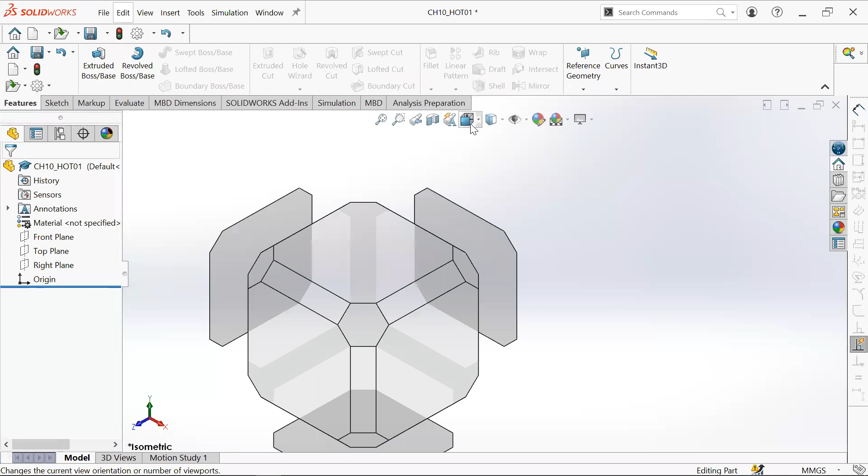So a good thing to do, if you know you're gonna make a drawing from the parts that you're making currently, is to check this view orientation tool. Oh, you can't move. Okay. You can hover around to different views of your part model that is yet to be made.

But it's a good idea to pick the isometric view and make sure your part model in the environment from this isometric view is what you want the isometric view in your drawing to be like. So as an example, this is essentially the isometric view of your drawing. Your drawing's going to have a front view, a top view, a side view, and possibly a bottom view, or maybe left and right views, based on the complexity

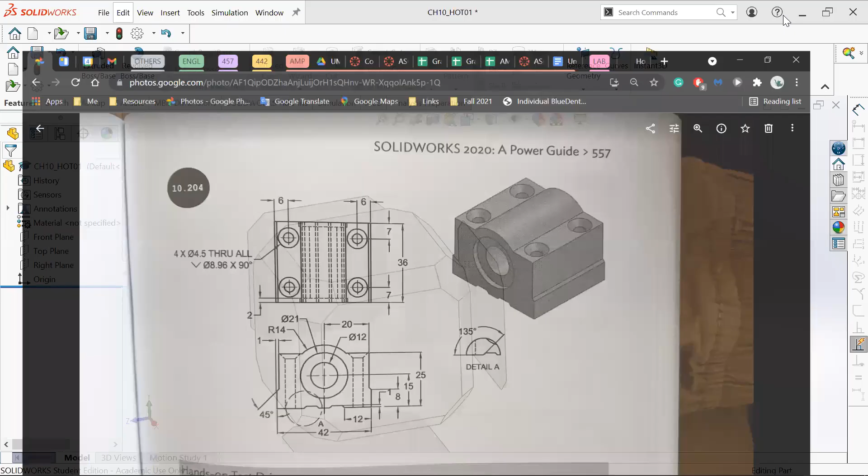of your parts. In this case, you want to make your part oriented so that your isometric view looks nice, and you can pull out all of these other views from your isometric view. Otherwise, once you're done making the parts, it's going to be very difficult, or maybe impossible, to get nice top, bottom, side, front, and isometric views from your parts. So it's better to just start with the correct orientation.

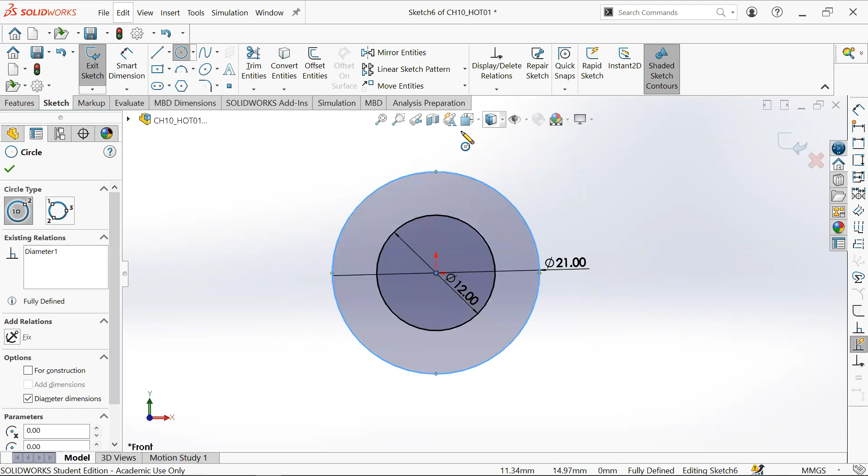Essentially, I want to start with the correct orientation. So in this case, sketch to basically mimic the orientation that's given in the textbook. So I want this front plane to be the front view, this way. If you see here, view orientation, isometric view, as you can sort of tell already, when you extrude this out, it's gonna be very similar to this view right here.

So again, you want to be mindful of the orientation your parts will have, because it's very difficult, or at least very annoying, to change it later on down the line. So start with the correct orientation.

So again, 12 millimeters diameter, 21 millimeters. Okay, this arc here is 14 radius. It appears we can just do half of this and mirror it over to the other side. That would be much easier than doing both sides. So let's make a center line.

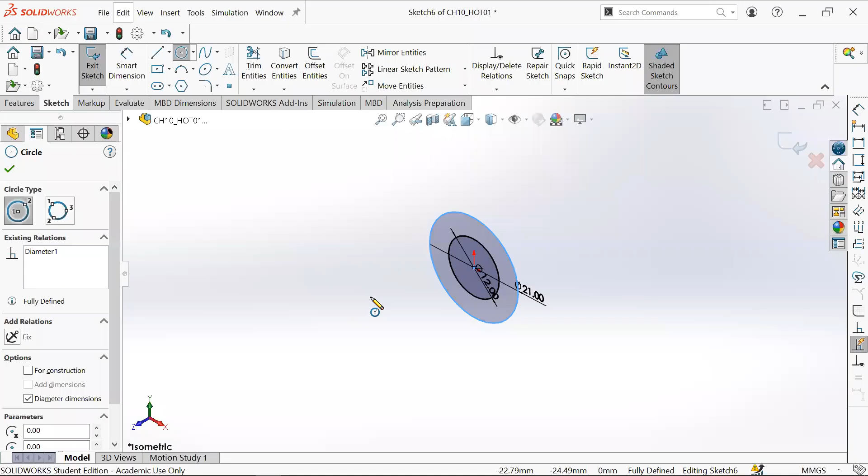Keep in mind to make a center line, and then an arc here with a radius of 14. So let's go back to our sketch, Control 8. Let's make a center line, or construction line. Make sure it's vertically constrained. Nice. This is not going anywhere. Perfect. Let's make an arc.

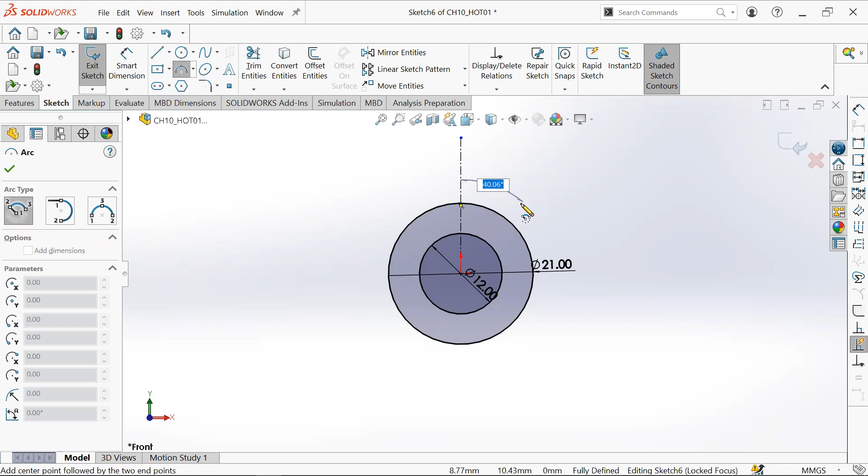Let's do a 3-point arc. In this case, I'm not sure if the center point is the same. Let's double check. Okay, so it seems like all three of these arcs or circles are concentric. So we start right here, go up to 14, click enter, click, pull out a little bit. We don't have to make sure that this arc length is a certain amount just yet. Once we get the other lines down, we can then fully define this.

Okay, let's see how long this horizontal length is. So this length here is 1 millimeter. This whole length here is 12. This is 20. So going from the center line to the sideline here is 20. So we basically go off of that distance.

So let's make some lines. One here, one here, one here. And I'm just going to get a general shape down. It's not going to be very accurate, but I think I have a good idea of how it looks roughly. You can always go back and make it more accurate after you get a general shape down. Okay.

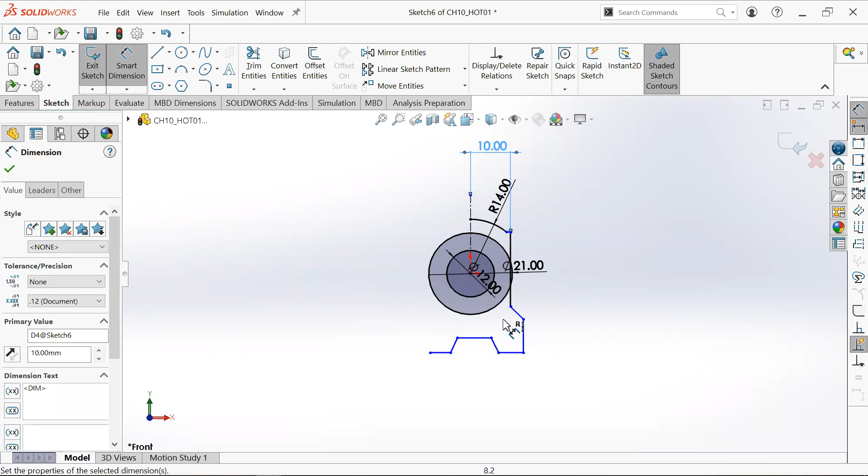So this side length here to the center line distance is 20. This distance here is 20. Not 10, 20. There we go. This is still defined. This arc length here is not defined. Let's see if we can define that. Okay, we can define that by just setting this height, I think, to 25. So this height here should be 25.

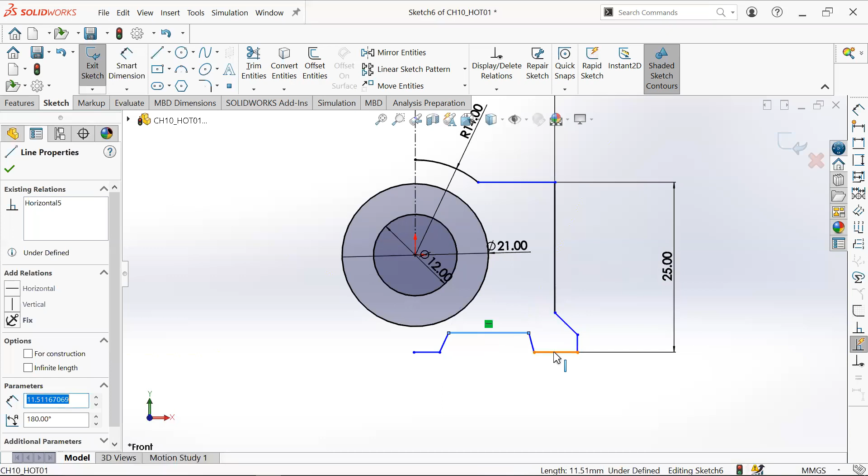Okay, it seems like these lines are horizontally constrained, which means they will move together. Oh, never mind. You want these to be collinear. This way, these two lines will move together. Perfect. Okay, so this thing still moves, which means we're still missing a few dimensions, but we're not in a rush. So let's take it slow, nice and slow.

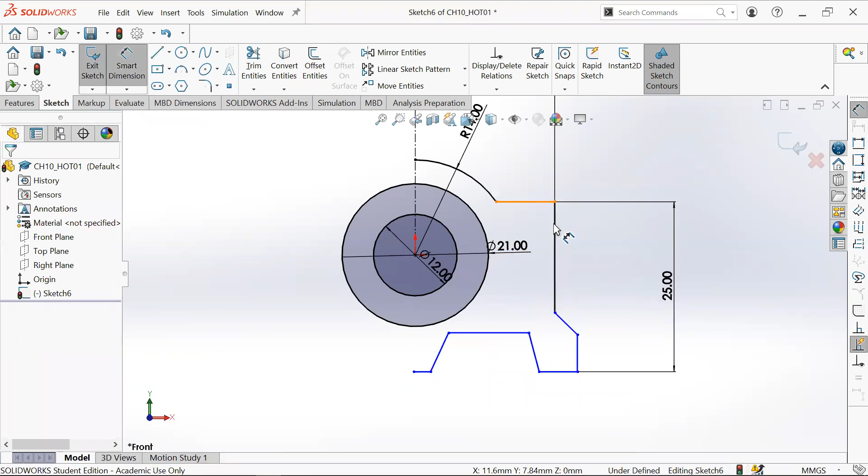So going from the center point of these circles to the bottom is 15. Let's do that. Center point to the bottom is 15. There you go. So now this is fully defined. Perfect. So as you add more dimensions, oftentimes it will become fully defined without you actively trying to define it, as long as you add the correct dimensions step by step.

Okay, let's organize our dimensions because it gets very confusing and messy if you don't. So let's place these in strategic areas to be out of the way of the sketch. The bottom length here is 1. This length here is also 1. These seem to be chamfers. You can either chamfer these or you can directly build them into your sketch. This symbol here is for chamfer. We'll talk more about that next video.

So let's see. As indicated here, this angle here is 45 degrees. Okay. And because there's a center line here, you only have to label half of the shape if it's symmetrical. You can instantly assume that because there's a center line right there, whatever dimensions are on either side will apply to the other symmetrical side as well. So in this case, both sides have this angle of 45 degrees.

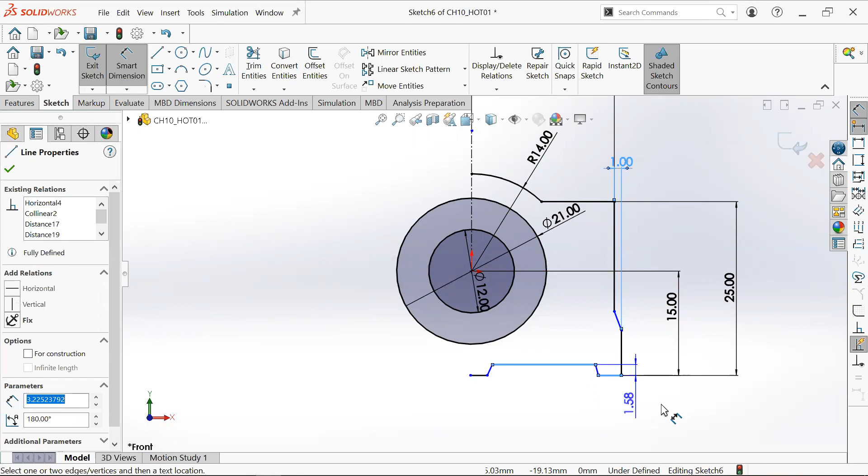And this bottom here has an angle of 135 degrees. So these are all basically 45-degree angle chamfers. But you can either chamfer these or you can just sketch them into your part normally. So let's check our dimensions again. This is 1. And this is also 1. Nice. So now we have this thing.

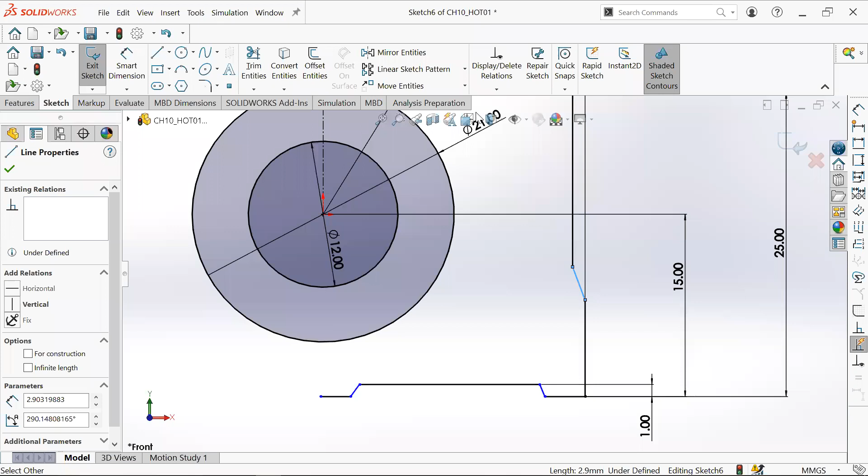Let's see. Okay. Because they used this point here as a reference point, I believe it's easier personally for me to just sketch in these chamfers instead of using the chamfer tool. So I'll just manually put in the angles. Again, there's more than one way of doing these things.

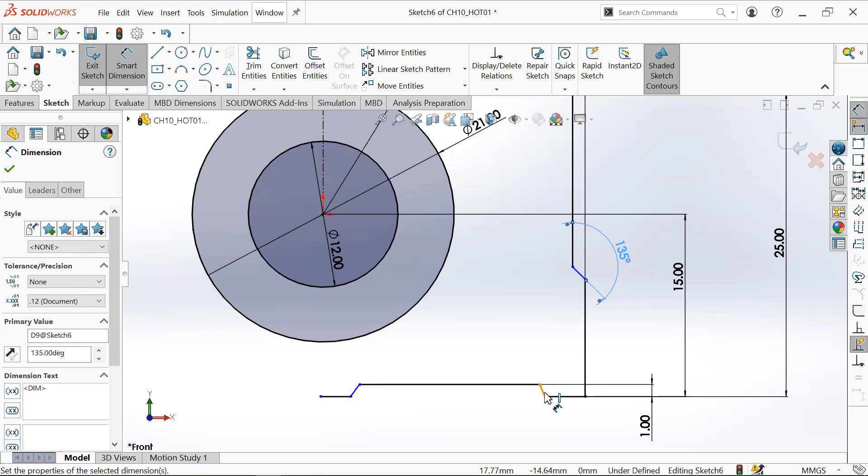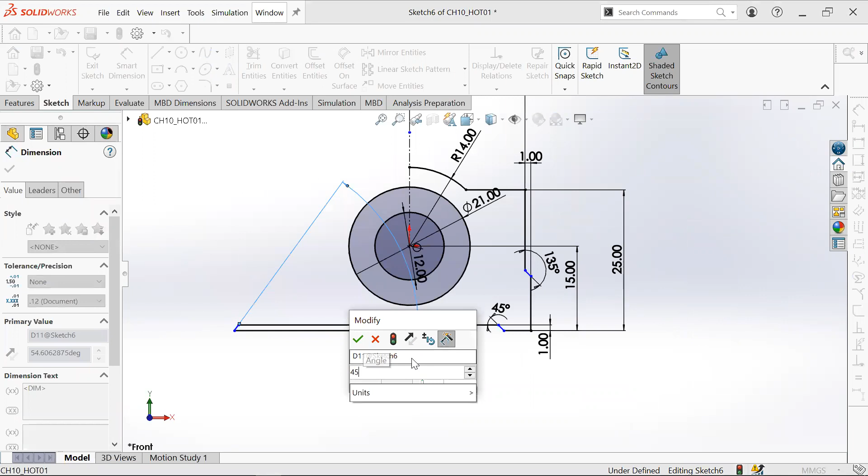So based on where you start your angle line, you either get 45 degrees or 135. It's just based on where you start on the arc. And so let's make these the same as well. 135. Oops, these are 45s. And, oops. Okay. Drag this back.

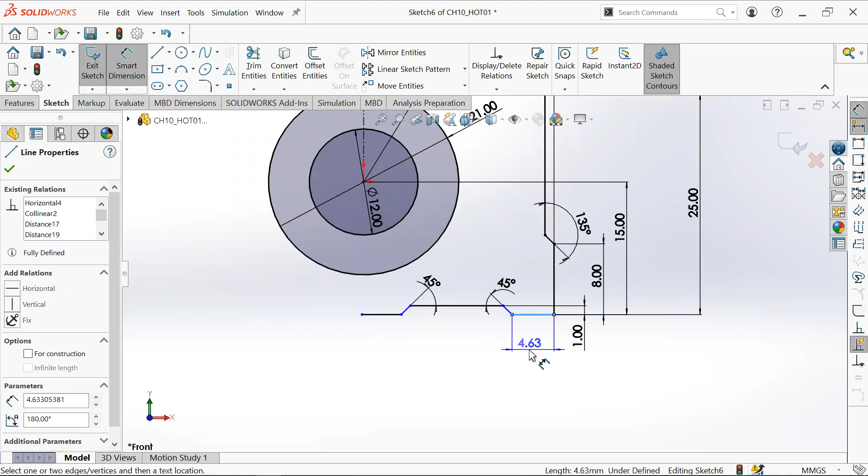Interesting. Pull this down. All right. Let's see what dimensions we're missing. This is 8. This is 12. So let's add those. This is 8, and this is 12. Wait a minute. Yes, 12. I want to make sure that this point and the center point here are vertical. That way, when we mirror this, this point will connect with the other side.

So this is still free to move, still blue. So we want to constrain this somehow. This distance here, 12. Is it missing a dimension? Oh, no, the total is 42 millimeters, which means... Huh. Interesting. What am I missing? 20, 12, 14, 45 degrees. It doesn't say how long this is. Am I missing something?

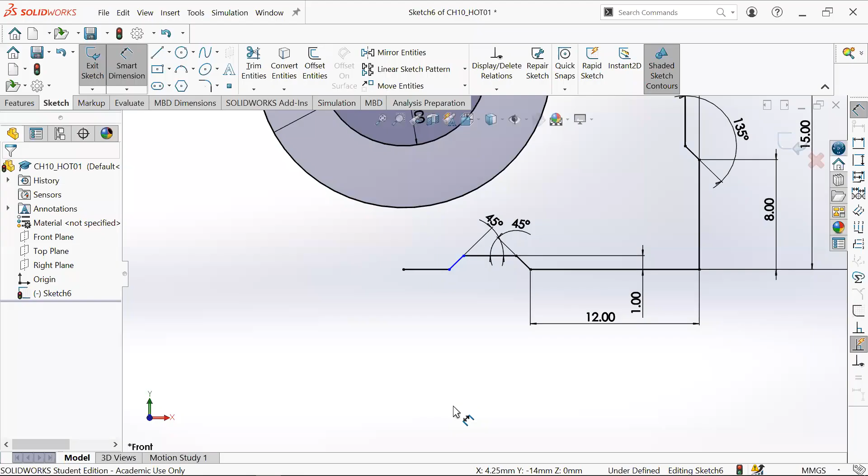All right. It looks like this is not dimensioned. Pretty sure it's missing a dimension here. No, nothing. Double check. 2, 6. Is it aligned with something? It is not aligned with anything. 12. Yeah, it doesn't say what the length is here. But we do know this full length here is 21. Okay, we don't really need that part. So we're missing a dimension here. I am not sure what this is actually.

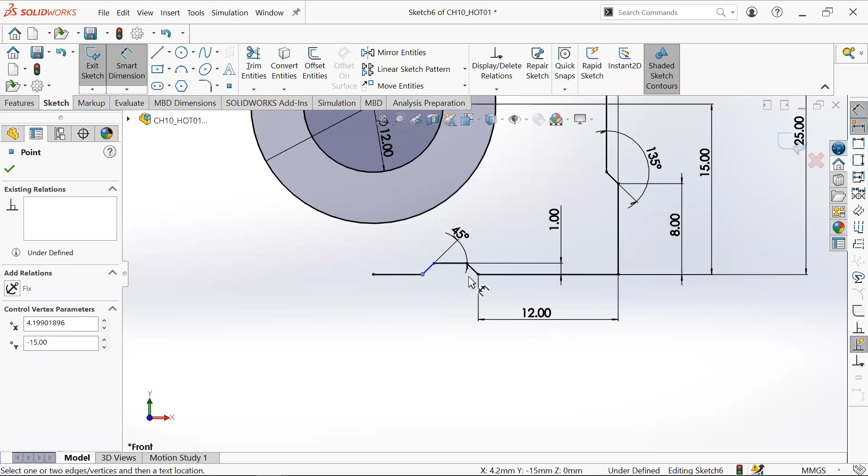We can actually get rid of this angle as well. If we make these two lines here parallel, we only need one dimension. Nice. So now it looks much cleaner. What is this length here though? Doesn't say. We might just have to assume what it is. I don't think it matters too much in this case, since this is not an assignment for you guys. So we can just give it an arbitrary value. Oh, whoops, this is way too much. 4.5. It seems about right, actually. It's either 4.5 or something near that.

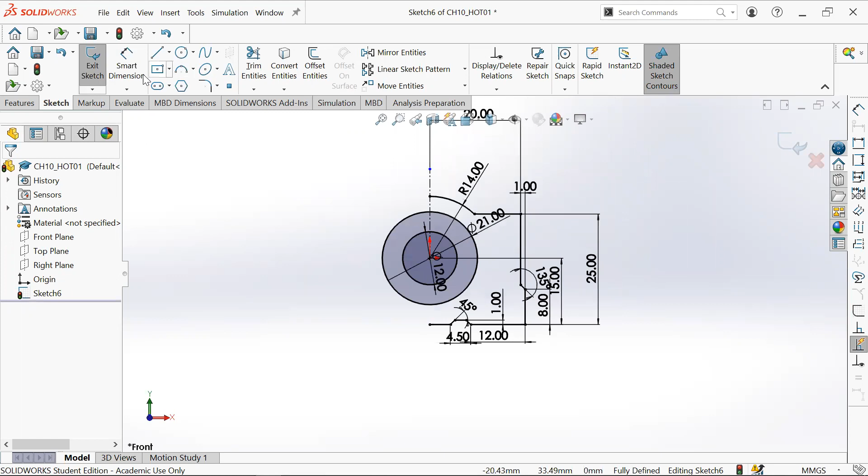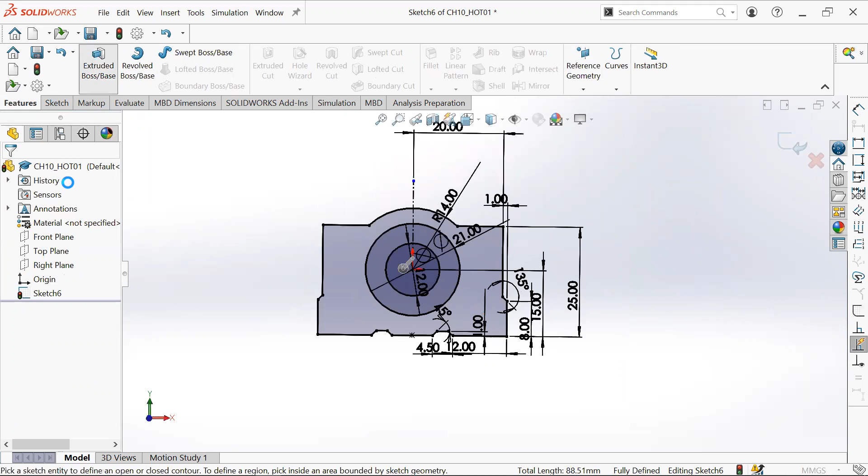So now we can mirror. Again, we're just going over the concepts here. It doesn't matter if you get the dimensions or the part model perfectly accurate. So we just want to mirror the outline, and we mirror about the center line here. Check. Kaboosh. Done. Okay. We can directly go into features, extrude. And we can do a both side extrude. So make sure to select your contours correctly. So we want to do this outer ring, I think. Yep.

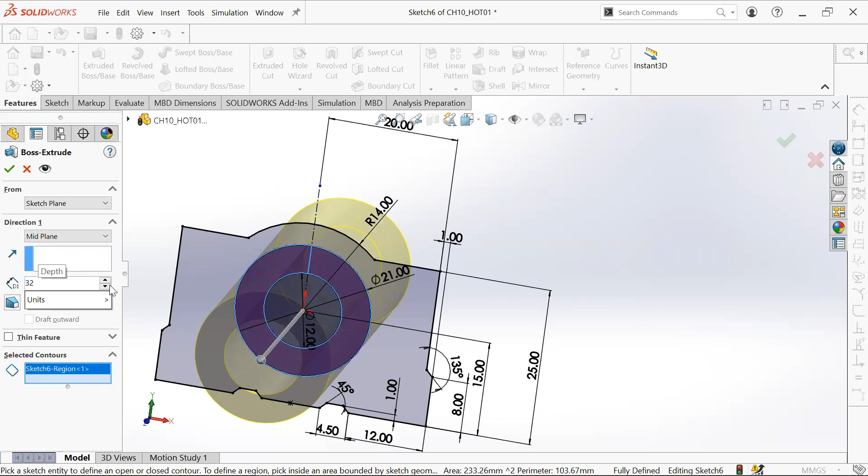And this outer ring, there's a gap of 2. There's this little indent here of 2 millimeters. So 2 millimeter deduction from both sides, and the total length is 36. So the total length on the inside here will be 32 because we're missing 2 from both sides. So instead of doing blind, we do midplane. And then instead of 36, we do 32. All right. Make sure everything's fine. We don't want thin feature, we just want this. Nice.

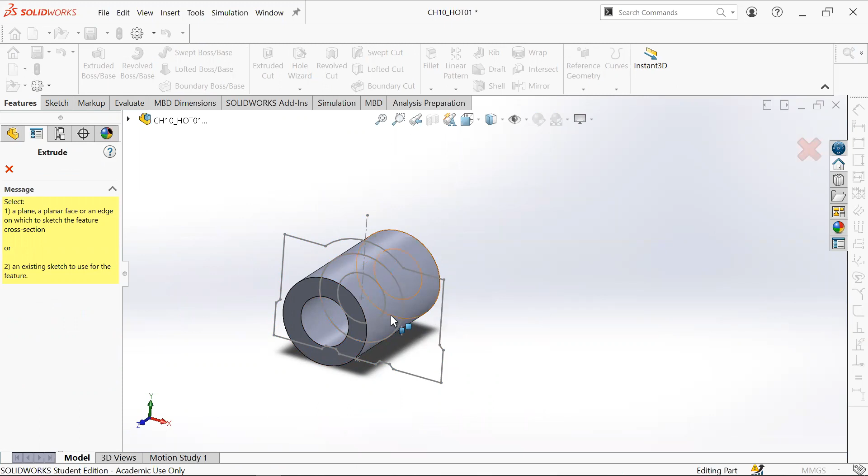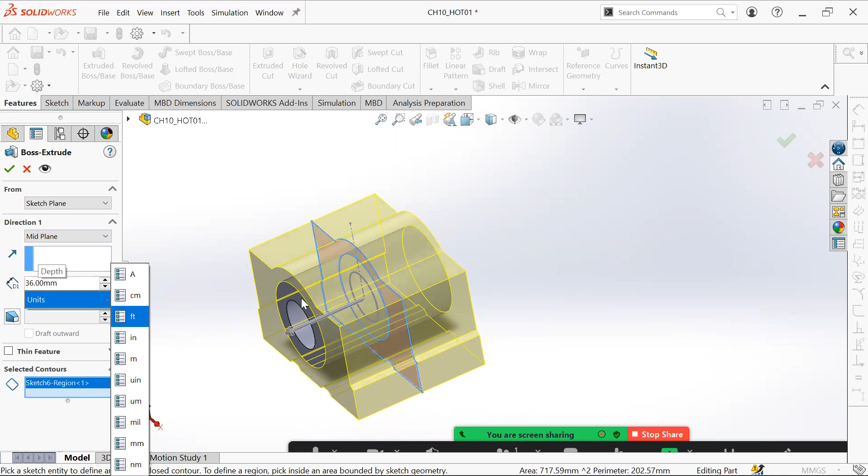Now we go back and show the sketch, and extrude something else from the same sketch. And now we want to select the outline. So we don't want the contour that SOLIDWORKS selected for us. We want to choose our own contour, which is this. Midplane again. For this, we want 36 because it protrudes out more than the inner extrude. It's longer than the inner extrude. There we go. Now this basically is how our overall part looks. We're making good progress so far.

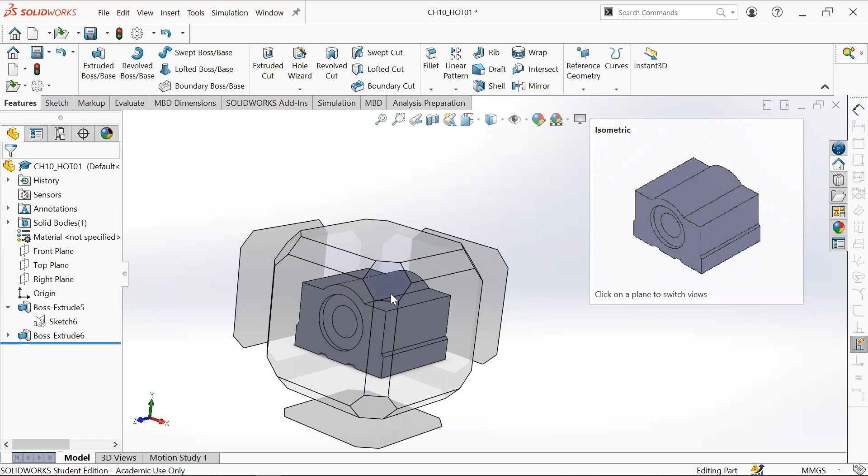Nice. So if you go back into your view orientation tool and hover over isometric, as you can see in the picture, the labeling on the top left corner says isometric. So this is the view you'll get if you place it directly into your sketch, the same view given in the book. So you want to make sure that when you're building your part, your isometric view looks like what you want for the drawings. Basically, you're planning ahead. Even before you start making the parts, you're thinking about how your drawing should look and how it should best be oriented so that it's easier for the viewers and for you to make out.

So let's finish the part. We're missing the holes, and those should be it, I think. Okay, so the holes are chamfered. Okay.

Okay, so we can make these using the hole features because I believe these are a certain type of hole that the hole tool can give us. So let's just put down some circles or some points for us to use as reference when we're using the hole tool. So let's make them. There's 6 from the side and 7 from the bottom.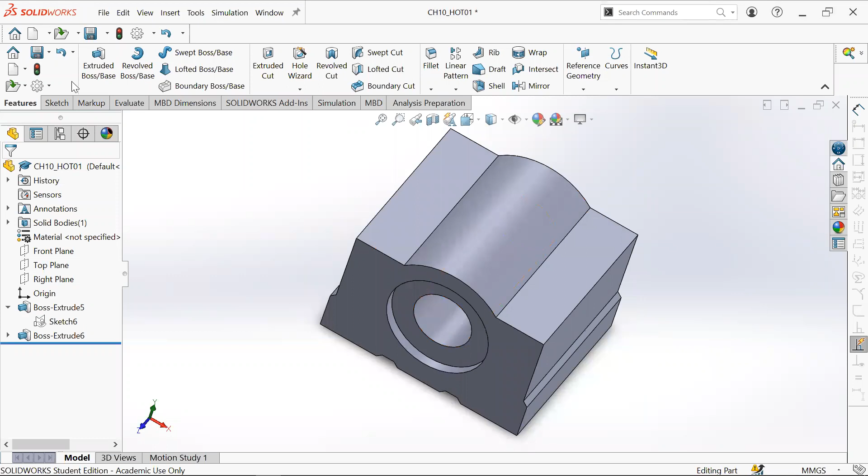Okay. Let's sketch. We put our sketch directly on this top plane here. Since these two surfaces are on the same plane, we can just sketch on this one surface, this overall plane that's on the surface. So let's see, sketch, circle. We can just do, okay, 6 on side, 7 from.

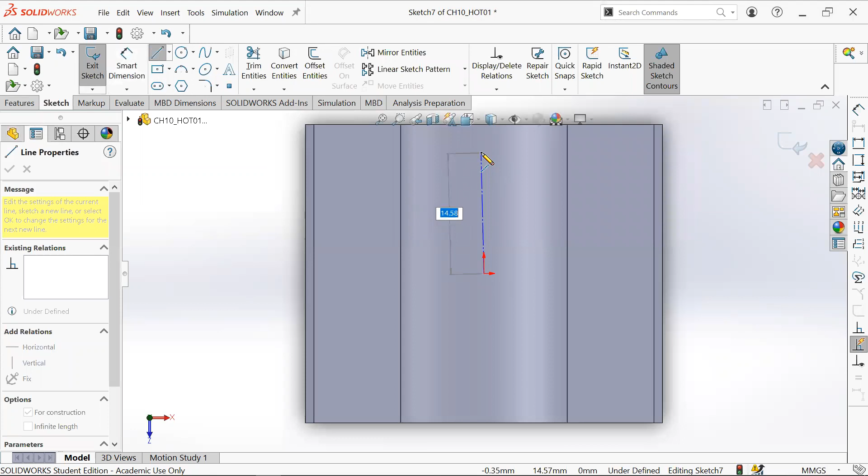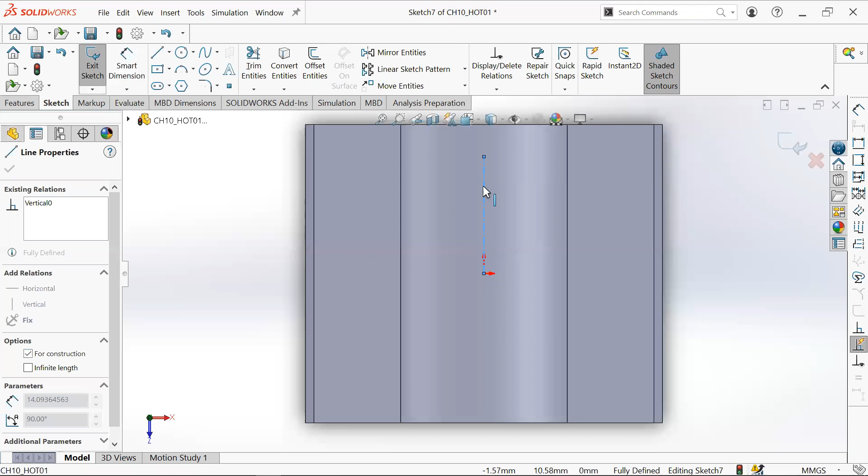We can also use the mirror tool here. If we just make a center line, we can either mirror before or after we use the hole tool. In this case, mirroring after using the hole tool will be easier because we don't have to select an extra 2 circles for the hole. Want to make this vertical, so it's fixed. This is not going anywhere as well. So make a circle, make a circle.

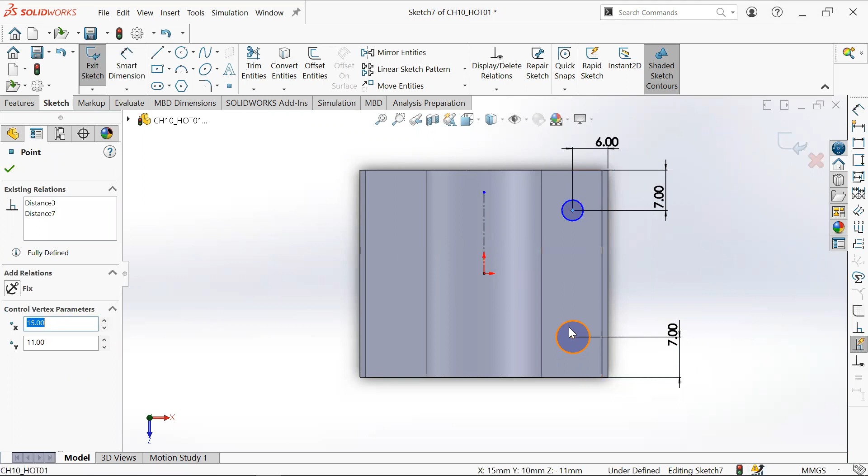I believe it's 7 from the top, 6 from the side. Yep. Shucks. On the long side. So center point to the long side should be 6. And this height here should be 7. And for the 6, we can just make these 2 vertically constrained. They're on the same vertical line. Let's make these 2 circles equal as well.

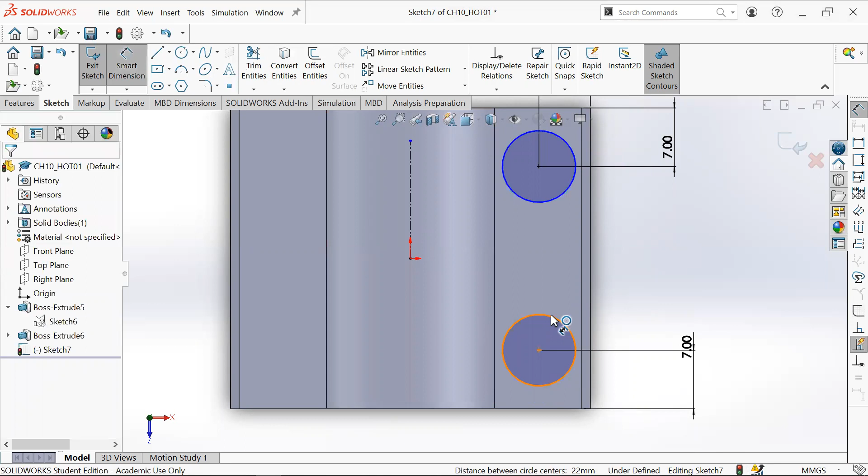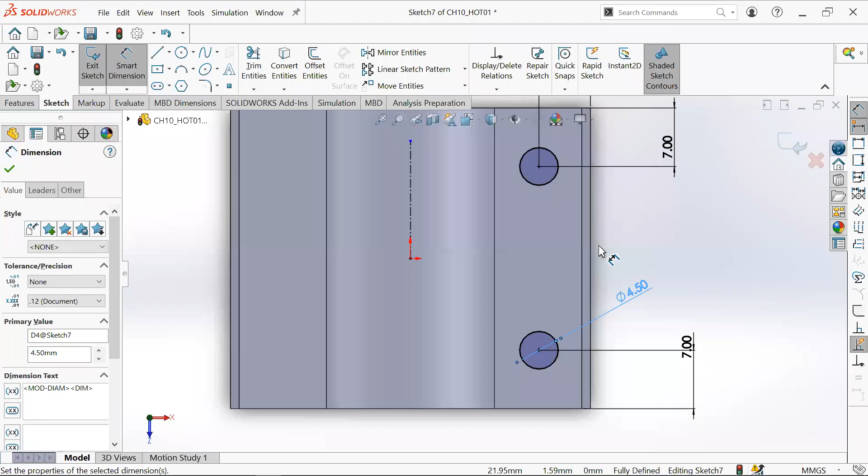And then we can just dimension one of these circles, which is 4.5 millimeters in diameter. Nice. Okay. So you have to be careful. This is the outer diameter of the circle, not the inner. So make sure to keep that in mind and double check to make sure that your circles are the right diameter. But this seems a little bit.

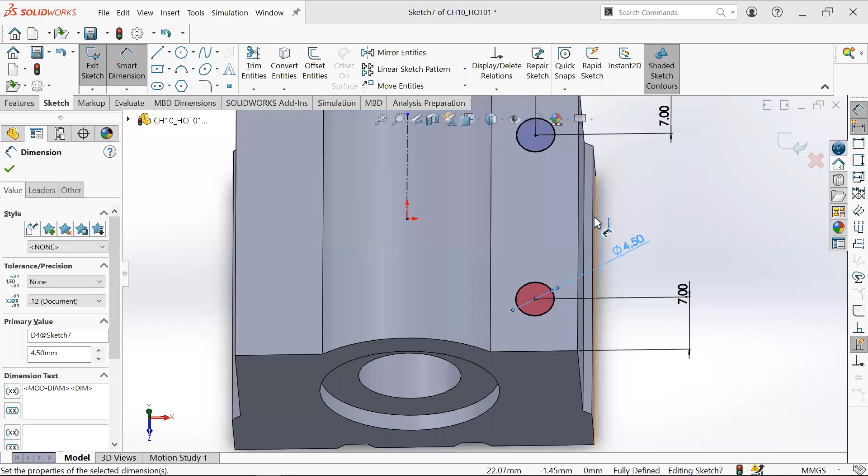Oh, no. Okay, so the inner circle is actually 4.5 millimeters because it doesn't look large enough. So I actually made a mistake here. It should be the inner circle that is 4.5 millimeters. Yep. Okay, since we're already here, you can either use the hole tool or the extrude cut then chamfer combination. Let's try doing both. Let's try the hole tool first, and then we can do the other approach, which is extrude cut then chamfer.

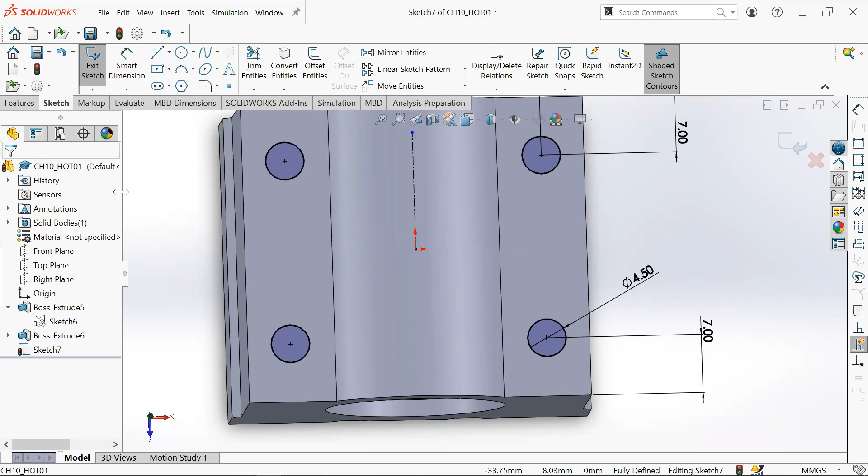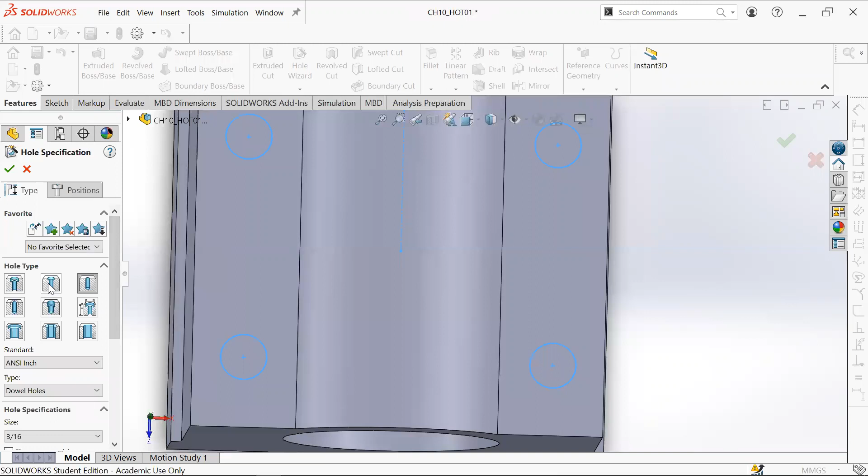So first, let's finish the sketch by just mirroring these 2 circles about the center line. Okay, everything's fully defined. Check your bottom, fully defined. Nice. Okay. So let's start by going to features using the hole wizard. There you go. This is the countersink hole type. Positions, we choose the center point. We click on the surface, we choose these center points.

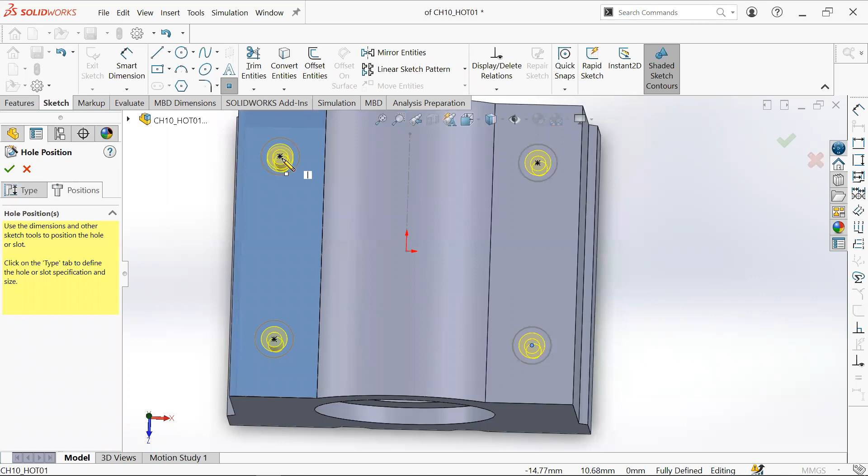So in this case, we don't need the circles, but the circles are convenient in that they have a center point built into them. So you can choose to either use extrude cut or a hole type. It's slightly more work than just putting down points, but it gives you more options. And I just like using circles as well. So again, there's more than one correct way of making these parts. Who knows? Maybe your way is much faster, or you just prefer your way better. Up to you.

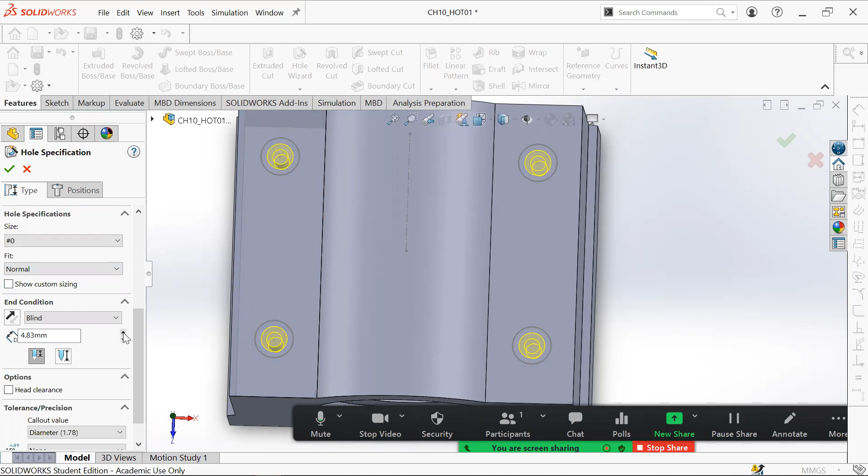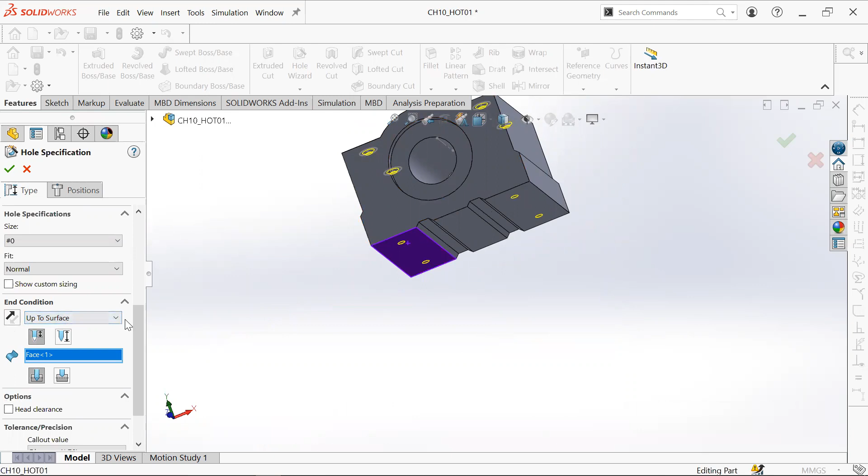So let's make sure these dimensions are correct. Oh no, this distance here is not correct. Let's choose up to surface, so the hole goes all the way through until it hits the surface. Nice. As you can see in this preview, the holes go all the way down until they hit the next surface and stop right there. So that is what up to surface means. You can change the direction, but we don't want to click on that option for this case.

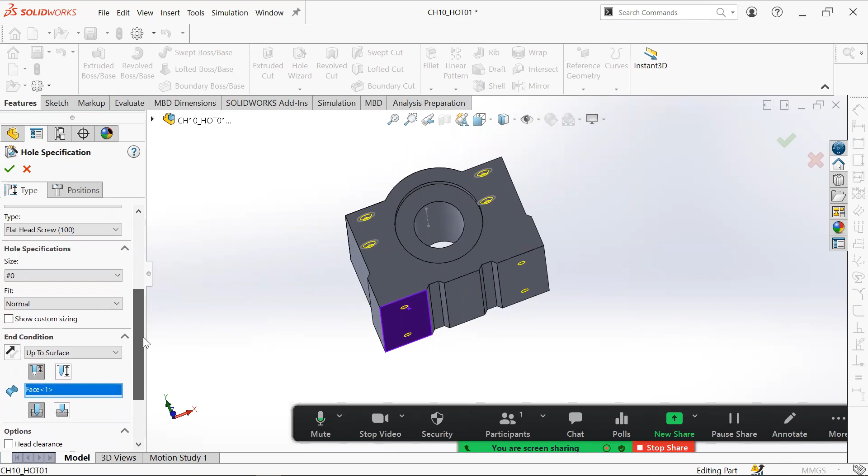Okay. So tolerance and precision, this is not for us right now. We don't have to worry about that. Let's check the size though. The size is not correct. Let's make sure this hole matches the diameter that we have with the circle, because as we had previously looked at, this diameter is actually the inner hole shape. So we're gonna change the size a little bit.

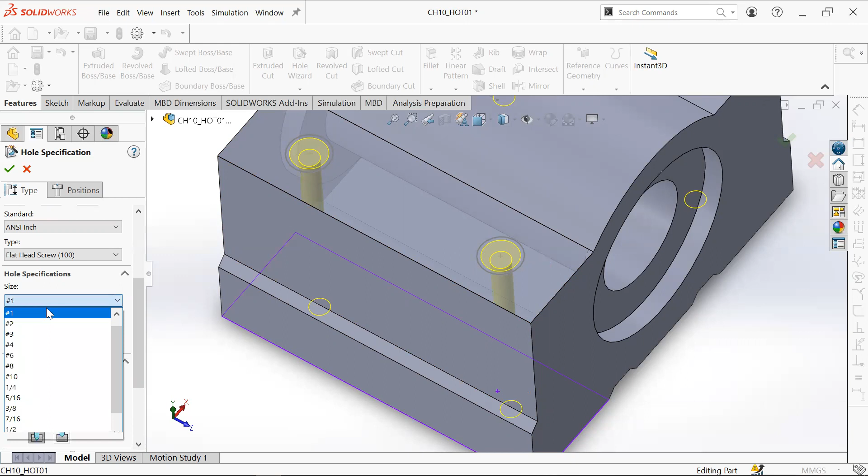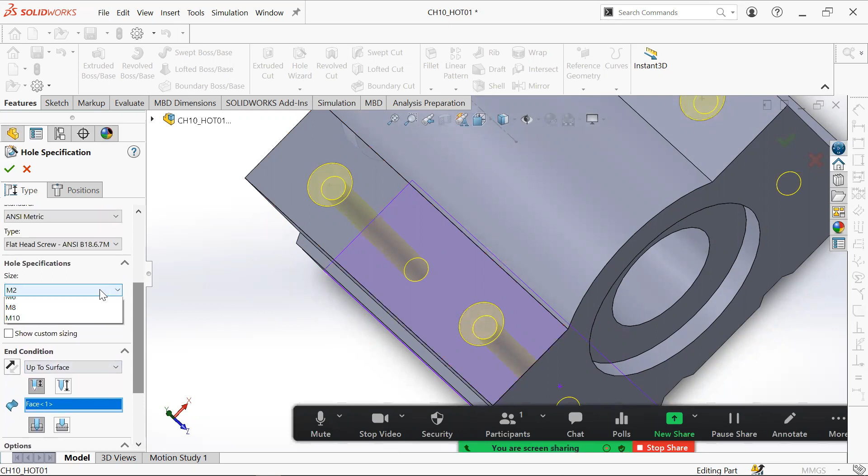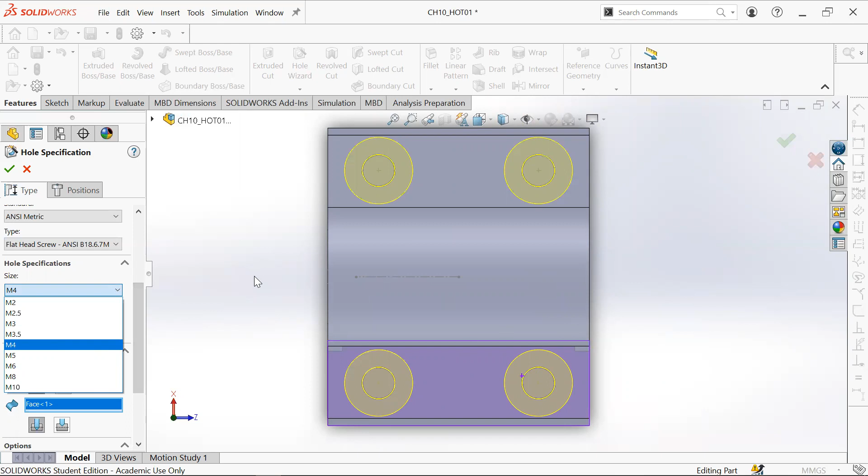So we're gonna change the standard to millimeters, so it's easier for us to determine the hole diameter. Let's see, ANSI metric should be fine. So we want M4, it would seem. So this is a downside with using the hole feature: the screw and hole names and classifications are a little bit more confusing. As we'll go over later, I think it's more intuitive if you just use extrude cut then chamfering, but this is one way.

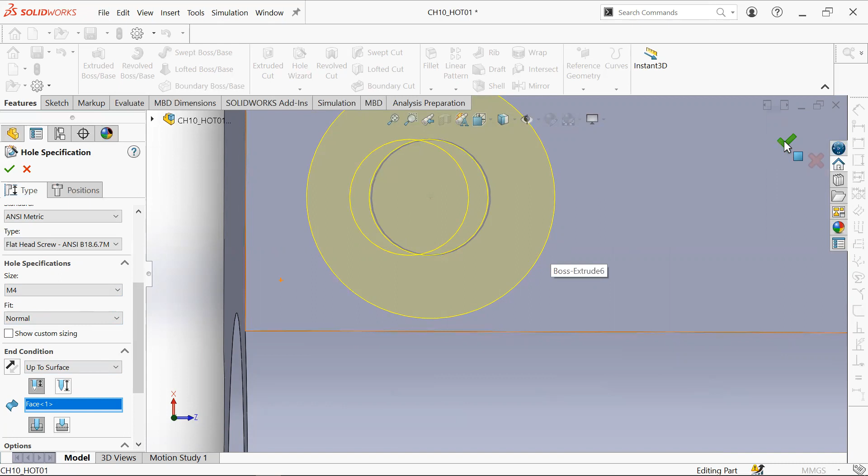Let's change the view. And this is one of the pros with using a circle instead of a point. You can tell if the circle's diameter aligns with the hole's diameter, that your hole, this M4 here, is the correct measurement to go for. So we hit check. Now you have the desired holes, and we're essentially done with this part.

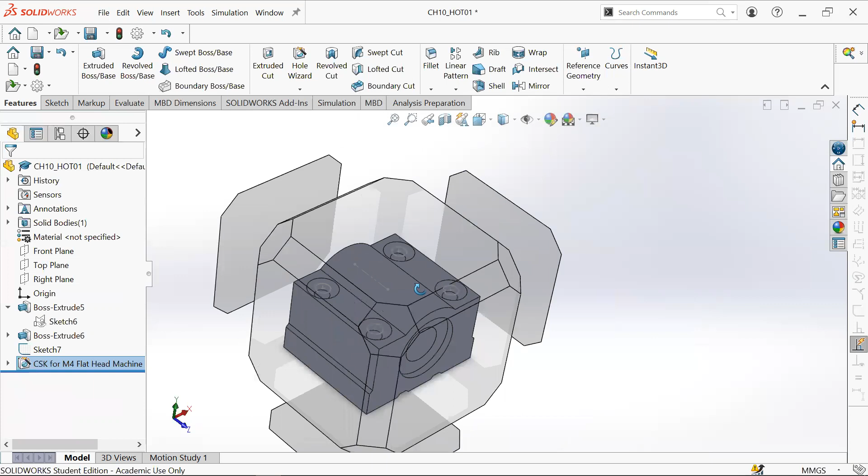Let's change our view again to isometric. I believe it is this one. Okay, this one. Nice. And this again looks pretty much like how our given part model drawing looks.

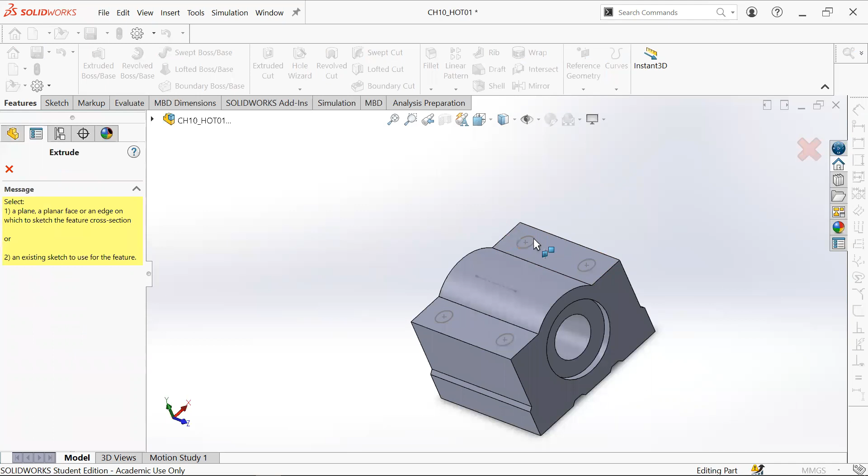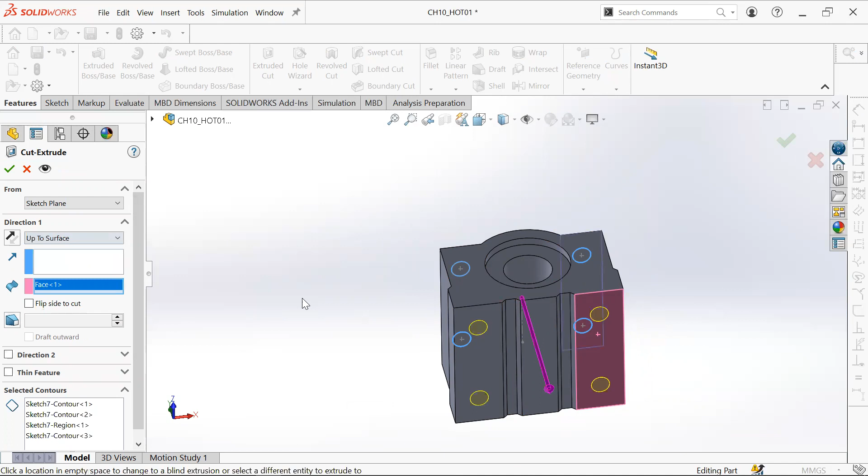Okay, so let's go over the other method, which is using extrude cut and then chamfering. Make sure to select all 4 of these holes. Up to surface. Click the surface. Oh no, offset from surface. Nope, up to surface. Okay, there we go. The holes will go up to the surface. And then we hit check. Then we chamfer these edges.

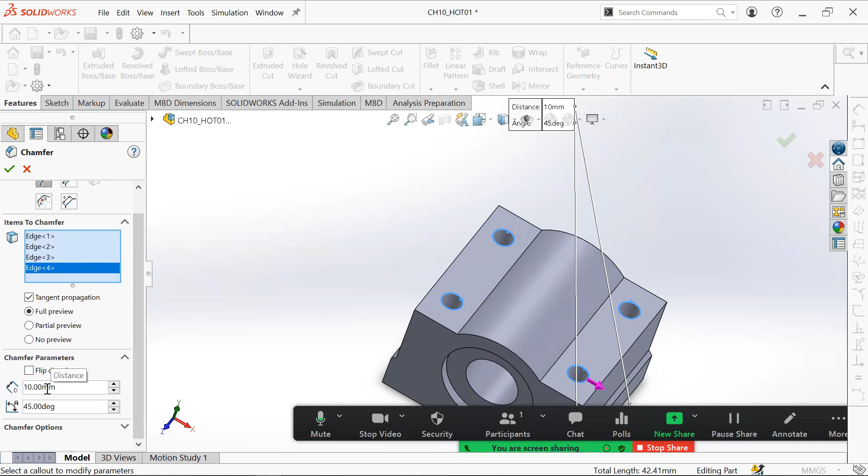Okay, so this chamfer is too long. I want to decrease this length here because you can't chamfer beyond the surface, beyond this object, basically. Gonna make this into a reasonable number. There we go. Let's check our sketch to see what the chamfer diameter is. 8.96. Wow, what a convenient number.

So 8.96 minus 4.5, that gives you 4.46. Divide that by 2 because you just want the difference in the radius, not diameter. So 4.46 divided by 2, 2.23. Want this length to be 2.23.

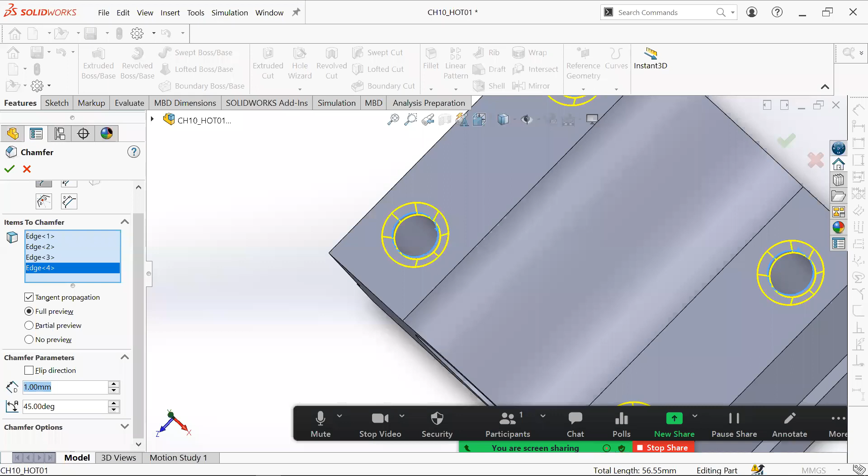And this is the other way you could have done it. Either way, it would have worked. In the end, you get the same parts, so it's up to you which one you prefer. There's probably other ways, but these are two ways that most immediately come to my mind. Just make sure we got all the dimensions down. Yeah, everything looks fine. Okay.

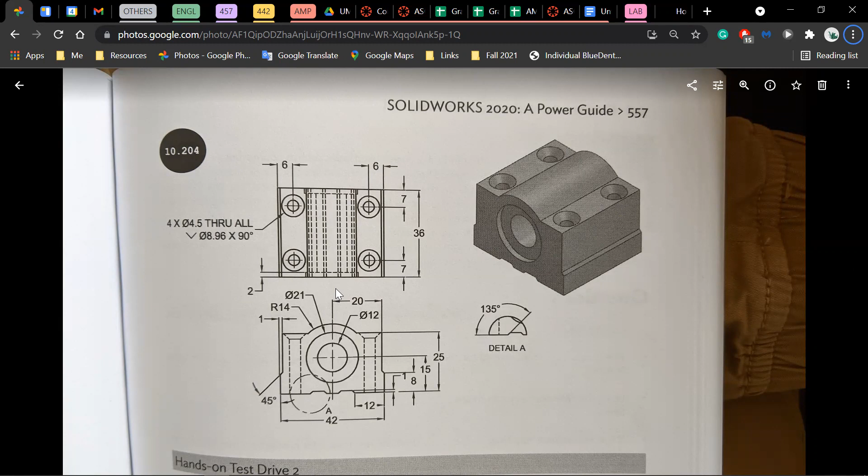All right. So before we finish up this part model, let's prepare it better for the drawing. The first thing I did to better prepare it for the drawing is to make sure that the isometric view is a convenient view that can pull the front view, the side view and the top view from. So this is just a convenient orientation, and I chose that before I even started making the part. Now we want to, going back to the Word document, add properties so the parameters can automatically propagate.

So once you get in the drawing template that you guys will be given, there's going to be two main sections. One section where you put the material, the surface finish, and the mass. And then one area where you put the title, who made the drawing, who made the part, who checked the part, the date, the iteration. We'll talk more about all those in the next video.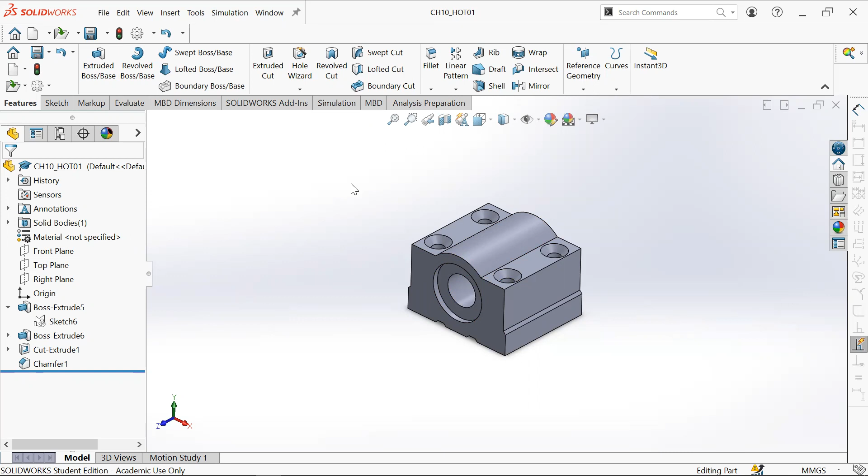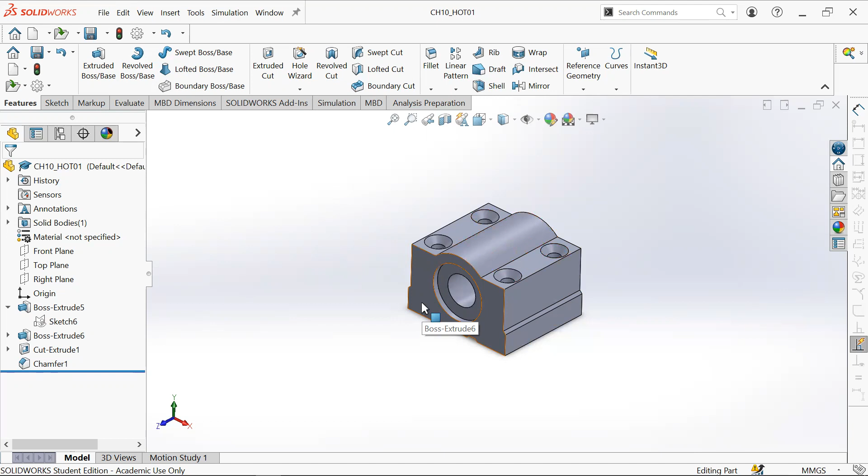But if you want to have properties automatically propagate in the drawing, properties such as the material used or the mass of this part, you have to add these manually into the properties of this document first. So I'll show you how to do that right now. It's gonna make more sense after I start the next video and show you how it connects. But as of now, I'm just gonna show you how to add properties for this part.

So let's first begin by adding material, because we'll need to define a material for future parts we make. So let's just do, I don't know, plastic, because I hate the environment. Let's do, I don't know, PET.

Wait, I wonder if styrofoam is a thing. Nope, okay. Probably is, just under a different name. Let's do with PET. Oops. Hit apply. Nice. I like this color too. Perfect.

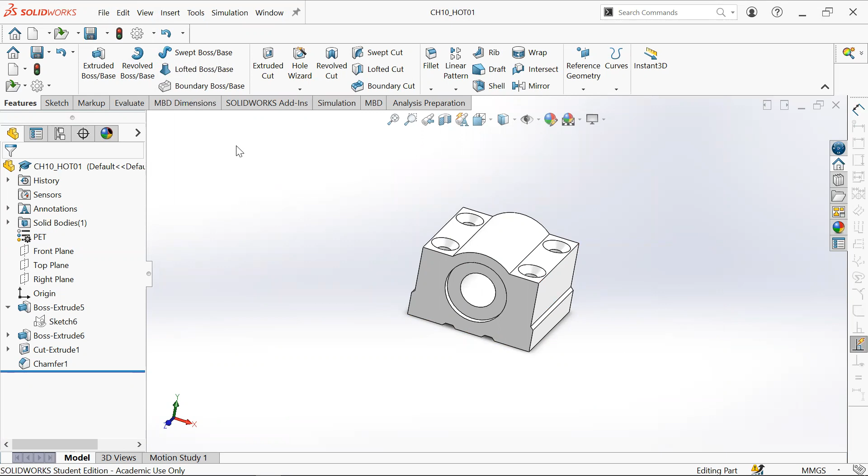Hit Control Save. Make sure to constantly save throughout your work process. Otherwise, if SolidWorks decides to crap out, you're screwed. That has happened to me a few times. SolidWorks is not the most consistent program, especially based on what computer you use. My computer is getting old now, so it's definitely not consistent. Make sure to always save.

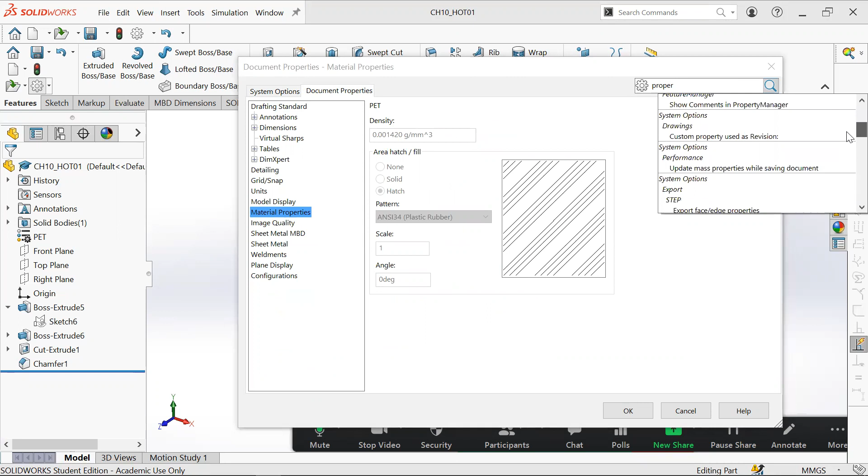Okay, properties. You hit File. You come down here, and there's a Properties tab right here. You can also, I believe, go into Settings, search up Properties. Screw it, never mind. File Properties. That's the most convenient way. So then you get this. Hopefully you get this window pop up.

And 3 tabs basically. I usually just stick with custom. These two have small variations in what they can apply to. I just stick with custom. I think this is basically all that you need for now and for the scope of this class. So you can add various properties such as material, and you have it linked actually.

If you hit this drop-down menu, SolidWorks has various variables ready for you. You can just pick and it'll automatically associate with this property name. So this property name is material. If you choose the first option, which is material, whatever material you choose in your part modeling environment, it will automatically be assigned to this variable here. And it's now linked to this property name.

And if you save it, this is now a property, which means if you ever change the material of your part in the future, if you make a drawing from that, it will automatically change and repropagate a new material name in your drawing. So that's just something convenient that you might want to consider, because you have to make parts and part drawings for your own project.

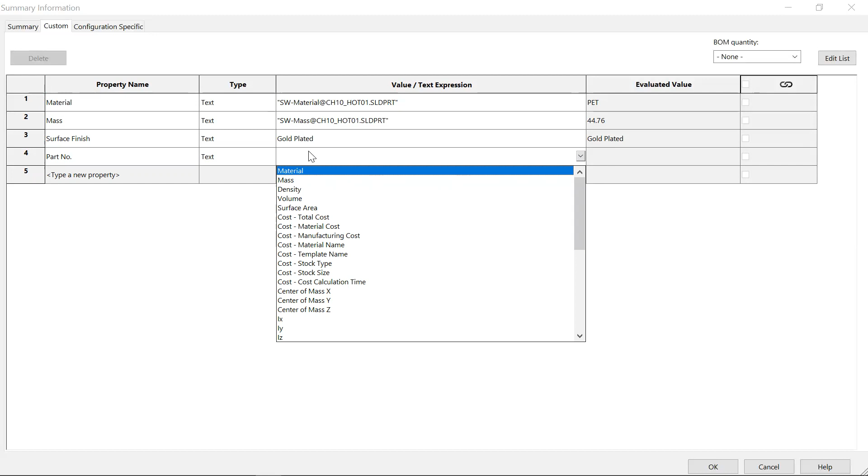And once you hit OK, these properties will be associated with your parts. You can also add things such as part number. Again, you can assign your own part number. So you can do some numbers that you like, 1166, and this can be your first 4 numbers, and then your first part in this series, 11661.

And you can do this for the next part. You can do 11662, 11663, 11664. So everything will be nice and organized. You'll have a part number. You'll have a space where you have to put down the part number in your drawing.

You can also add something like iteration, as in which version of the part model this is. If you made 3 changes to it, it will be the 3rd iteration, with the first untouched part model iteration being version dash. I'll show that in the next video.

So this will be our unchanged original model version, because most likely your first model might not work as you wanted it to. So you have to make changes to it. And as you make changes, you should document and resave new documents, new part models and new drawings. So you get to keep your old progress.

You can always refer back to your older versions, just in case your new version sucks even more than your old version. You want to be able to refer back to those old versions and not save over and rewrite the old documents. So once you hit OK, everything saves. Make sure you hit Control Save, and we will end it here for the first video.

Again, we made a part from chapter 10, hands-on test drive 1. I showed you some approaches that make the part translate much more nicely to the drawing. And we now know how to add properties so the parameters can automatically propagate in our drawing in the next video. So this is it.